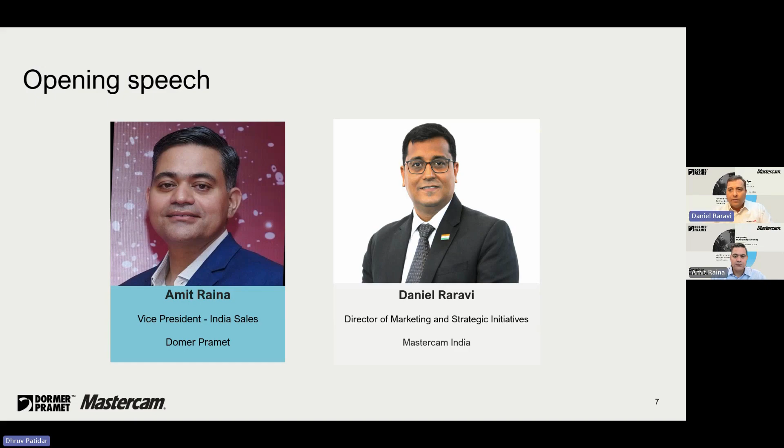And now, the heart of today's session. Multitasking machining is the ultimate productivity multiplier. It merges operations, eliminates idle time, streamlines complexity, and delivers unmatched machining efficiency.

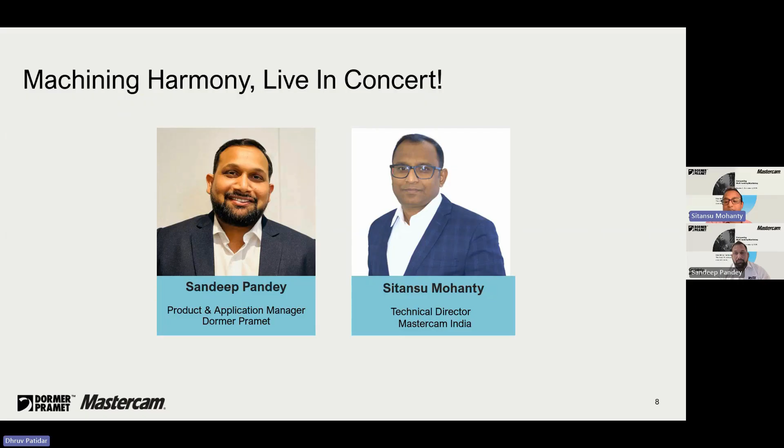As you can see, the topic is multitasking, and it's the third series. The initial series started with turning and dynamic milling. Then we went to high-speed machining as well as 5-axis. This series, we are talking about multitasking machines. If you go to the next slides, let's see the images. After seeing these images, you can understand that those parts require multitasking machines.

Think, if this multitasking machine were not available in today's world, how would we machine those parts? Previously people were also machining them, but without mill-turn, without multitasking machines, they had to make a turning profile and multiple setups for the milling. As we discussed, space matters, because if you have to put multiple machines, one for turning, one for roughing, one for finishing, space is a constraint. To avoid those situations, and for accuracy and finishing, the machining has evolved toward the multitasking machine.

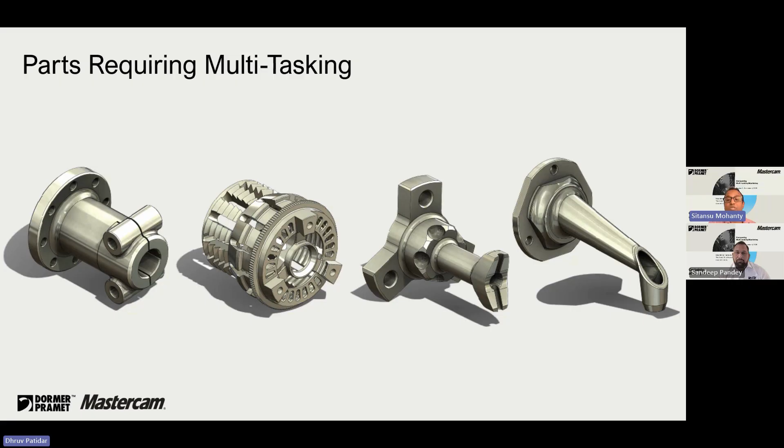When you discuss this mill-turn module, it is a combination of milling and turning strategies. It supports all kinds of strategies and options. Additionally, it supports part holding, bar stock, part transfer, and holding the parts between the main spindle and sub spindle. Let's understand what multitasking is and how it will help you. Go to the next slide, please.

What is a multitasking machine? It's a machine which can perform many operations in one setup. This is exactly what we are looking for. Once the bar stock has been loaded into the machine, it has to do the turning applications, the machining applications, the multi-axis applications, and both-side setups have to be reduced. So it reduces the cycle time and increases accuracy, because it is one setup, not multiple setups.

We call it multitasking because it reduces setup and machining time and increases productivity. Which type of customers require this kind of machine? That is also a big question. The normal die mold industry does not require such a multitasking machine. Today we are focusing more on aerospace, some parts of automotive, and medical. These are the major industries running such machining, because the parts and processes are complex, and people have to think differently to minimize the process and cycle time. The multitasking machine will help you with this.

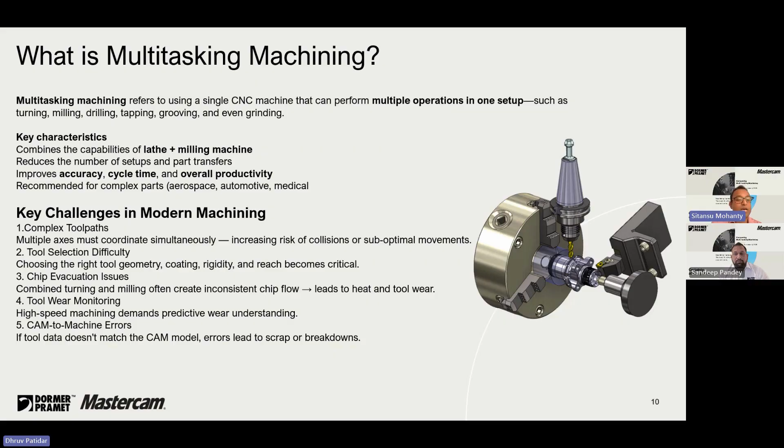Next slide, please. So if you see this particular machine, XYZ is a common standard 3-axis machine. But when you go for multitasking, X, Y, Z, B, C, when you include the head orientations, main spindle, sub spindle, turrets, multitasking is always more than 9 axis. So all the operations, like Sandeep was explaining in the previous picture: one tool is doing drilling, another is doing turning, some other tool is doing 5-axis machining.

So multiple tools, because we have multiple turrets, upper turret and lower turret. Those operations are combined synchronously, and it shows how to reduce the cycle time within the shortest time. The cycle time has been reduced because of the synchronization of the many parts.

And when you incorporate more axes, the important thing is the collision chances: the collision between the axes, collision between the part and fixtures, everything a user needs to consider. For that reason, within the software also, we incorporate two, three things importantly. First, the complete machine model setup has been incorporated inside the tool.

The tool geometry, as we discussed, 3D tools or any profile, any customized tools has to be incorporated within the software, and the strategies. These three things have to be combined together to create nice toolpaths which can be collision free, error free, and the user will get more confidence on that. This will always allow the complex profile to be machined in one setup because we have all axes incorporated together.

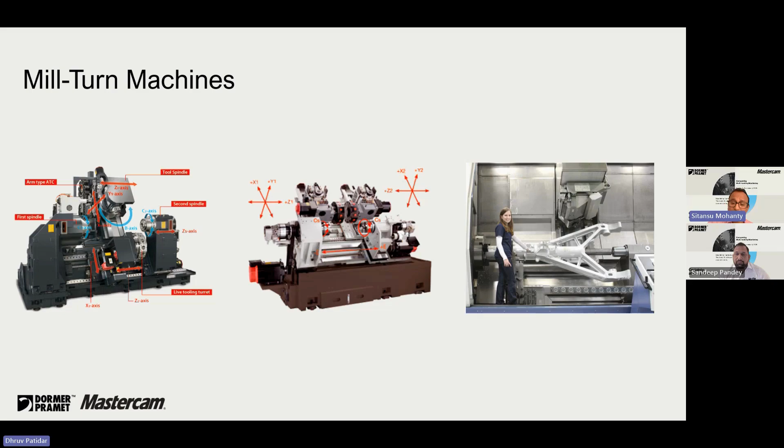Also, if you go to the next slide, we can see there are many turrets and you can assign specific slots for specific tools. Like I told you, we can directly import the Dormer Pramet tool models library into Mastercam, and we can assign number of tools, number of holders, everything. Whatever library they have, Sandeep, we can import inside the software and create the strategies. So can you throw some light on these kinds of tools and how they will help you in this?

Yes. So you know that many of these machines come with multi-station half index tool locators, tailstocks, steady rests, collet chucks, then the VMC spindles which will have HSK or BT tapers. So you will see multiple combinations of work holding and tool holding arrangements. And fortunately in Dormer Pramet, we are equipped with all these kinds of tool holding arrangements, where you will find we have PSC or Capto systems, simple turning tool adapters, VDI adapters, and all kinds of spindle tapers, BT, BBT, HSKs.

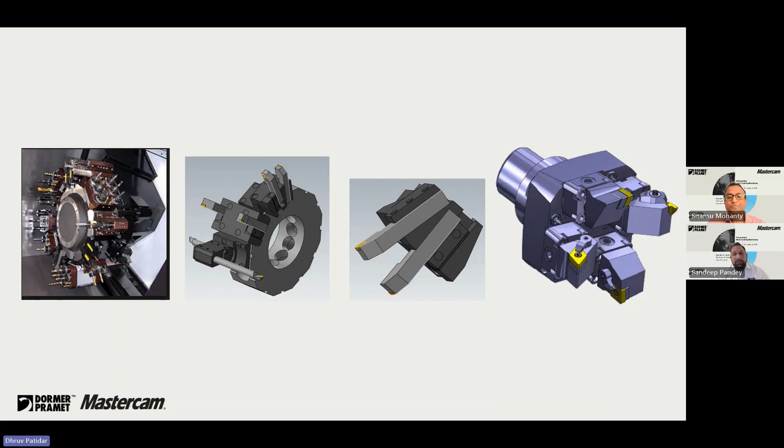So we have everything. And as you rightly mentioned, Sitansu, we have the models available in the Mastercam library, as well as on our website, where it's free for all. Anybody can download the 3D models, easily incorporate them in their software, and use them for simulation purposes. Absolutely. Next slide, Dhruv, please.

As we discussed about the multitasking setups, now let's discuss more about the role of the cutting tool in multitasking machining. In multitasking machines, turn-mill or mill-turn machines, the cutting tools are very critical in enabling multiple machining operations in a single setup. Because these machines combine turning, milling, drilling, and other processes, the cutting tool system should support high flexibility, stability, accuracy, and at the same time give more productivity.

And why it becomes very important: as I mentioned earlier, you need to manage different cutting forces. The cutting forces will shift between radial forces during milling, axial forces during drilling, and tangential forces in turning. Your tool should compensate all these cutting forces so that they don't go to your part or your spindle. It should avoid vibrations and at the same time maintain stability.

When you are selecting tools for multitasking machining, you should always keep the tool overhang optimum, because even 10% of overhang can destroy the performance of the tool. So it is very important to keep an optimum tool length. Here Mastercam comes into the picture, where you can select an optimum tool length and see the simulation, so you will not face any collision issues while running the actual program.

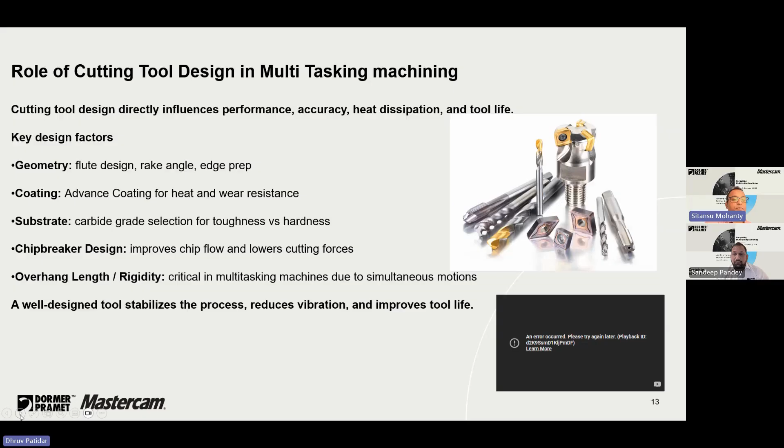So while generating any program, what's important, as Sandeep said, is geometry, because that particular geometry prevents collisions and improves the toolpath. The cutting edge point and cutting edge profiles improve the toolpath accuracy, and it finds out if there is any additional cut or hitting on the fixture or the workpiece. Everything will be calculated from that particular geometry, as well as the cutting parameters.

As we mentioned, we can directly incorporate the Pramet tool library into Mastercam, so automatically all those parameters are also included. Thank you, Sandeep, for giving all those parameters. A new programmer can easily sit and understand: when I'm browsing this particular tool, I'm already getting the efficient parameters from the tool manufacturer. Mastercam also, when you're machining the same tool with a different material, suggests parameters which help the programmer create programs in an easy way.

That is the major process: the tools available to us should make everything more smooth and easy. Like we discussed about the machine models, why simulation and digital twin simulation is required: because these machines are multitasking, we have many axes moving together, multiple operations going on, some operations on the sub spindle at the same time as some operations on the main spindle. So it's a combination of many things to optimize the exact cycle time.

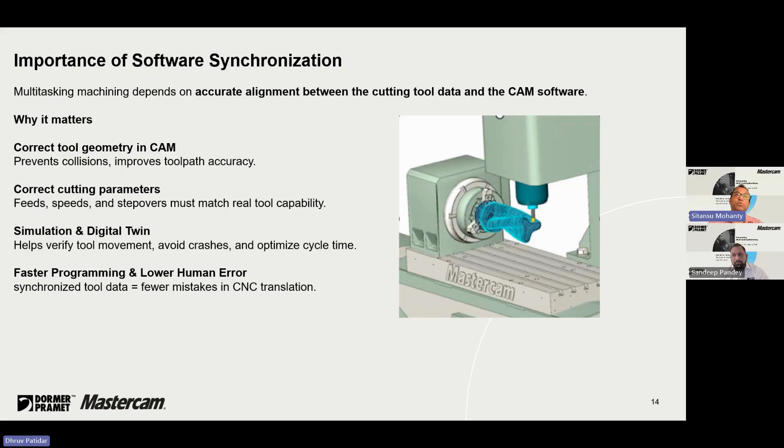When you are confident, you get the right tool, right strategy, right passes, and you can simulate everything on your screen before going to the machine. That gives you more confidence in how easily and quickly this can be possible. Let's go to the next slide. I'll explain how the software allows you to generate toolpaths for those kinds of operations.

When you open Mastercam, we can see we have different modules for different industries. We have a turning module, a milling module, and today we are discussing mill-turn, the multitasking machines. When you go for a mill-turn or multitasking machine, initially you have to define which machine you are going to use. You can see it on the screen. You can specify the machine name, whether it's a Mazak, a Haas, a DMG, or any kind of machine, and directly select within the software that you want to machine the part on this particular machine.

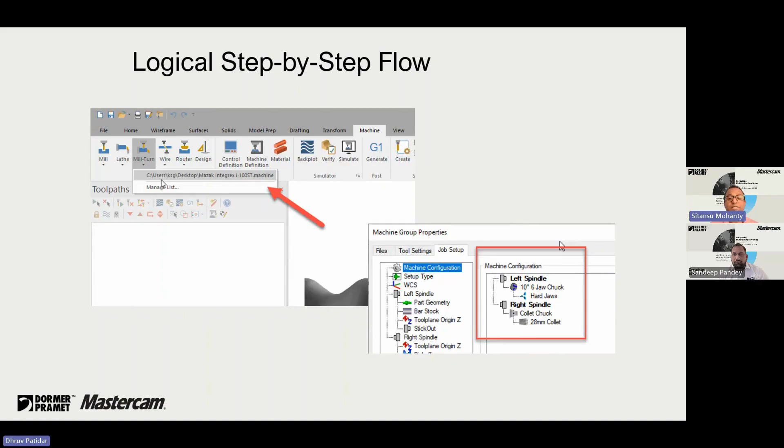When you go to the machine side, you have to define what kind of part you want to machine, like the 3D model, which I'm going to show you, like in the images in the initial slides. These are the parts, the part geometry. You have to just select the part geometry, and you have to select the stock.

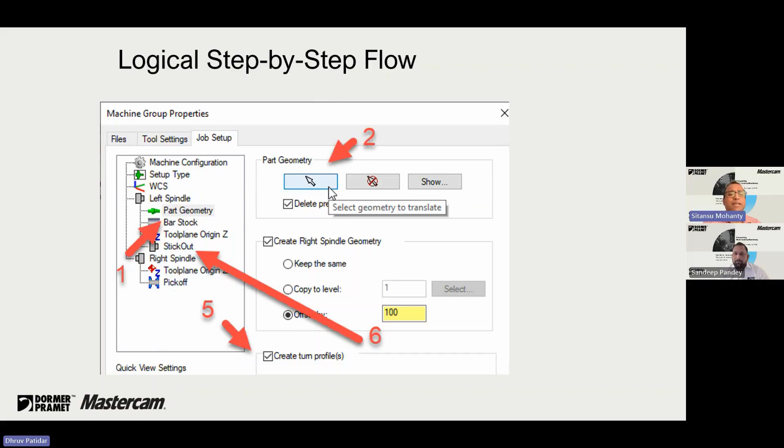What is the material? Either you are looking for a rectangular material or a circular material, you have to define that stock as well. So minimum setups - you can see how much stick out for the job, how much you are going to clamp it. The software has to be user friendly, giving minimum information required to generate any kind of passes. You define the machine first, define the part geometry, define the stock, define the stick out system of the machine.

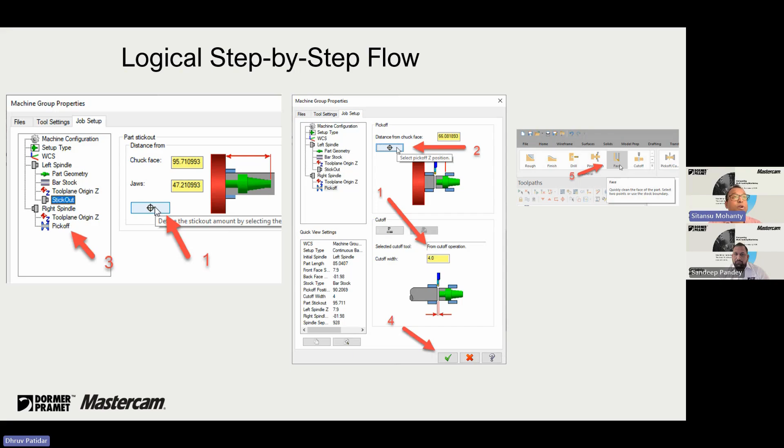Next, we can see different types of tools. As we discussed about the library, you can directly import. When you define that I am going with the upper turret, it will show you which suitable tools are available for the upper turret only - it will not show you the whole assembly. That is important, because if you get 100 tools, you'll get confused. Your turret has a capability of 16 tools, so it will show you all 16 tools available, 1 to 16.

That makes the process easier. That is important - when using a tool, you have to make the process easy. If it is difficult, the user will tend to make mistakes. To avoid such mistakes, we use the advanced options. This helps you select the proper tool.

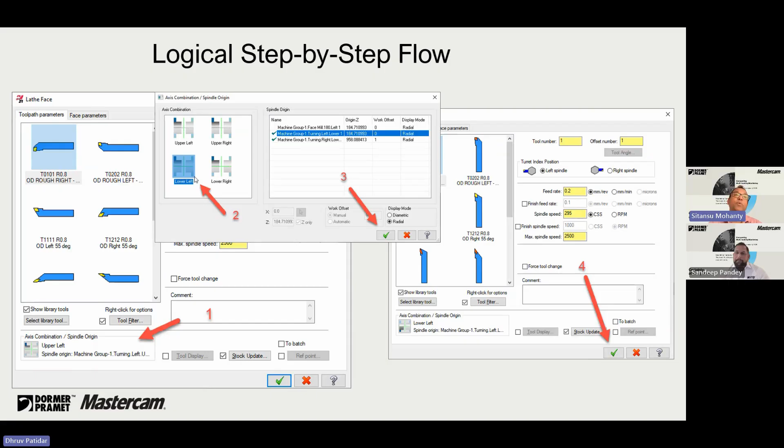Then you just define some lead in, lead out, because that is also an important part of programming - how your tool is going to enter into the material. If I directly plunge into the material without any strategy, it may break the tools, it may break the spindle, it may give more load on the spindle, it may throw out the job.

So the software automatically allows you to go through all those options. You just have to tick or untick, and automatically it will create those strategies.

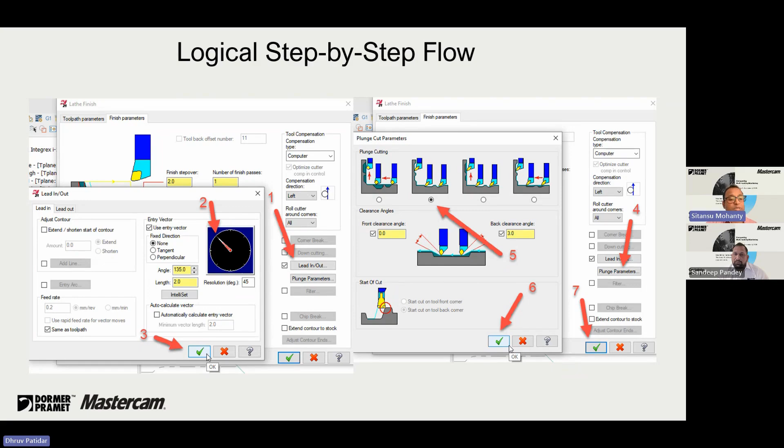Along with that, as I told you, we are importing the complete machine within the software. Inside that, we can also define the steady rest or the center subspindle rest - all the fixtures are available on your complete component. When you're machining the component, there may be fixtures, there may be a steady rest, which are going to hold your part or hold your job.

That allows you to check the collisions, because as I told you before, most important is correct tool selection, strategies, and finally you have to run on the machine without any collisions. So that gives you everything incorporated in a single window.

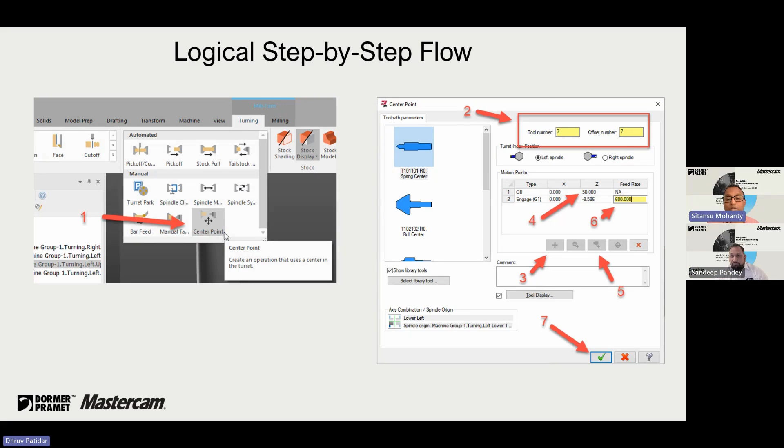It will be nice if we can play some video and demonstrate a real life example, and then talk a little more about the tools and how this works. Absolutely, absolutely. If I go to the next slide, I can show you some videos. Just see that particular part.

This is the machine we are using, DMG Mori Seiki NT4300.

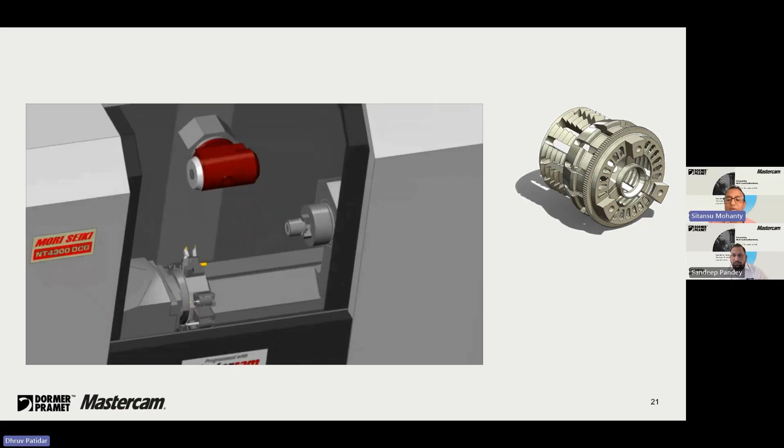The part model is called the Ironman powerhouse unit housing. You can see this particular part has first been placed in the subspindle and it's doing its operations. At the same time, it will change the operations from the subspindle to the main spindle, and it will start doing those operations. This kind of synchronization is very important to avoid any collisions.

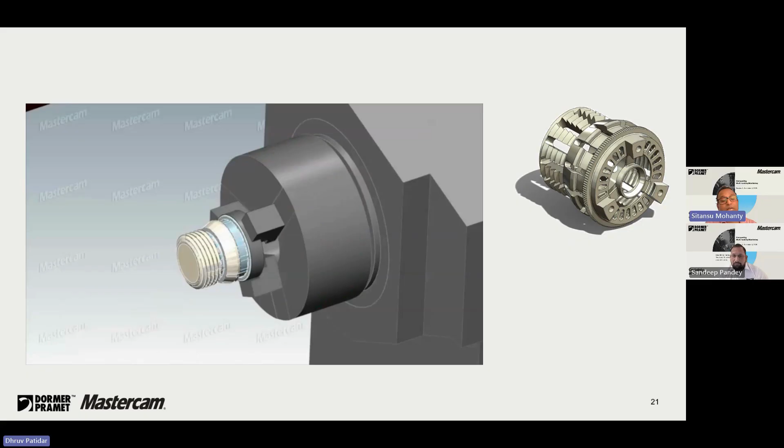You can see in the turret also, Sandeep, all those turrets, how much tool length is required. If the tool length is larger, whether it is colliding with other parts of the machine - those things also you are able to see. Here you can see there is a long range of tool being used.

So I think Sandeep, you have some solution. I heard somewhere Dormer Pramet has a solution for this longer tool length. Yes, yes, yes, so can you show about that tool length as well?

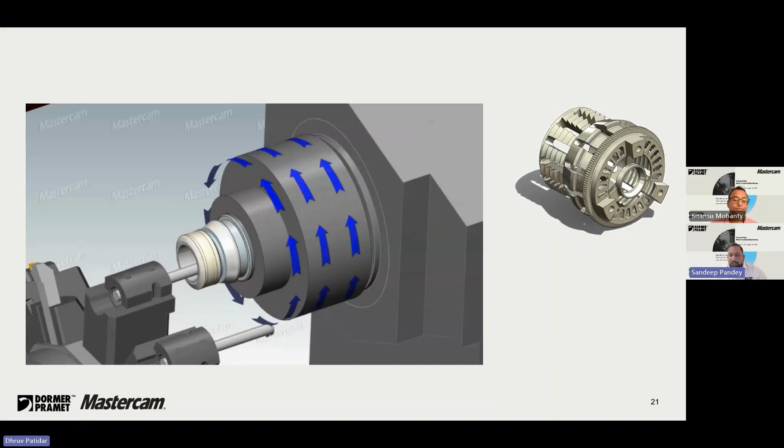When we talk about longer drills, Dormer Pramet is equipped to deliver entire solutions for these multitasking setups. Out of all these solutions, we have one which we call modular drills.

Modular drills have multiple features compared to normal indexable drills. With indexable drills, we don't get high quality holes, but with modular drills there's a separate head made of solid carbide, and a drill body with a length up to L/D 12, and a diameter range from 12 up to 42.5 - a very wide range.

The L/D ratio starts from 1.5, and goes to L/D 3, L/D 5, L/D 8, and L/D 12. Many other cutting tool suppliers have similar products, but the beauty of this product is the easy exchangeable heads.

When doing multitasking machining, taking the tool out of the machine and putting it back into the spindle takes a lot of time. But with this tool, there are two mounting screws in the drill head which you can easily replace, just keeping the tool in the holding system or in the machine itself. You don't need to take out the tool, go to the Zoller, change the entire tool, and put it back to the spindle - that takes a lot of time. By just putting this tool into the spindle, you can reduce man hours and increase your productivity.

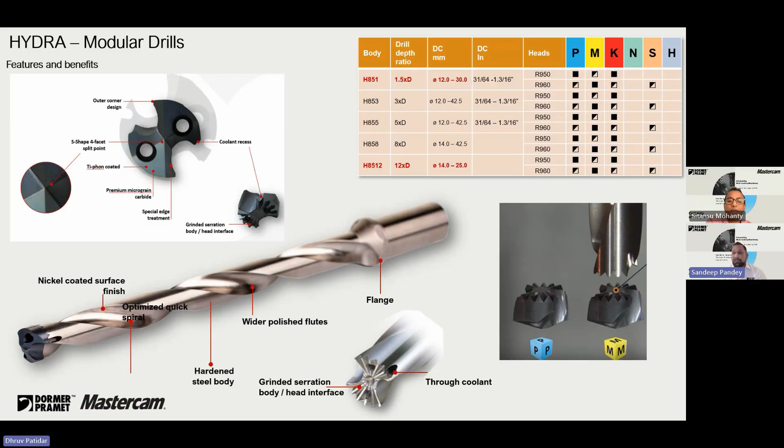Every time you will be getting tool performance equal to a new one. With regrinding, you will not get similar performance like a new one - that's the beauty of this product. It's as equal as solid carbide, but also reduces your cost and gives more productivity benefits. So it is a must-have tool for your multitasking setups.

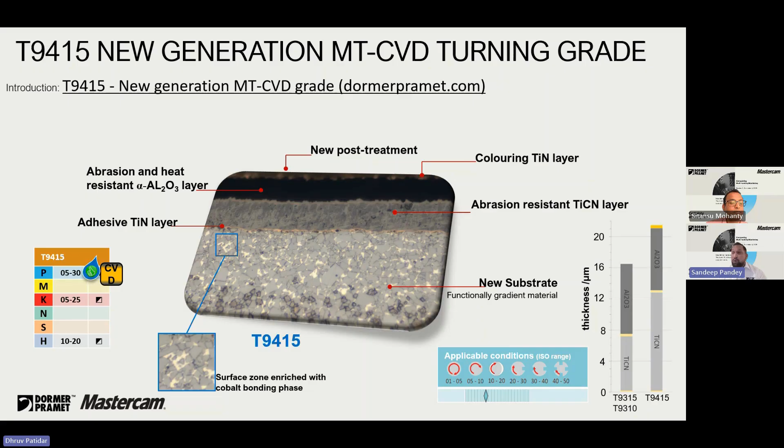What advantage you'll be getting with this is that whenever we put the insert into the pockets of the tool holder, we get a very proper seating, and your insert will not deflect during machining, or while taking higher cutting parameters. It will give more productivity, avoid vibrations, and give a good quality surface finish as well.

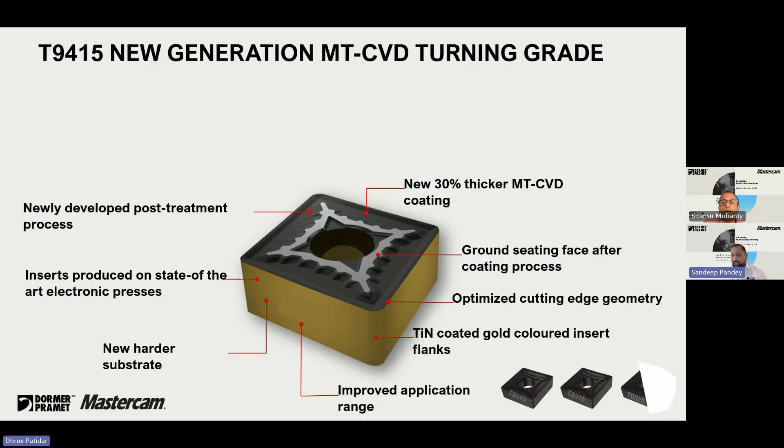Over to the next slide. Absolutely, Dhruv. Yeah, yes Sitansu, absolutely. So these are the inputs I thought for the programmers.

As you said, there is a 30% thicker surface coating. I think this will give more tool life - more running time compared to other inserts - and better surface finish, and the programmer can use high feed, where today's demand is to reduce cycle time. When you go for this multitasking machine, the main concern is accuracy and cycle time. So I hope this kind of technology you are providing definitely helps the user to reduce cycle time drastically.

Right, Sitansu. And also we are talking about quality, accuracy and everything, but I think we are missing one part - the economy, or maybe the CPC of the part. So here comes this tool, the SW104, which is a triangular insert. The triangular negative insert, meaning double-sided insert, comes with a 6 cutting edge design, starting from diameter 16.

You will be surprised that not many competitors have a 6 cutting edge insert in such a lower diameter, like 16, 20, or 25. When we have these kinds of setups, you get a lot of operations where we need this kind of smaller diameter tool, which can perform multiple operations like slotting or wall finish. So here this tool comes into the picture, where you can get the advantage of 6 cutting edges in a diameter 16.

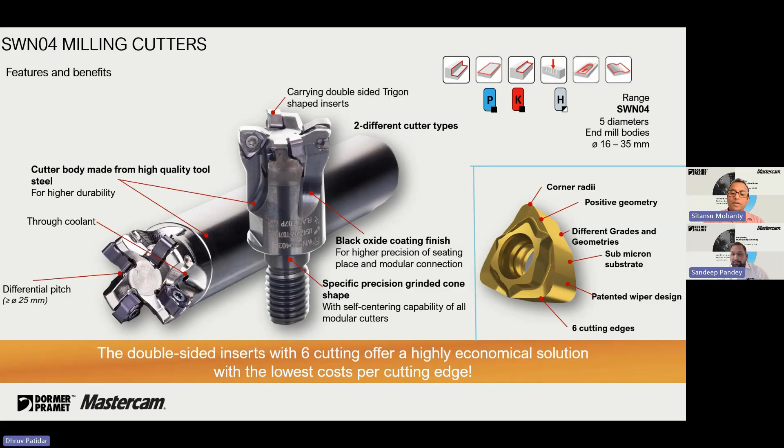Over to the next slide, Dhruv. Absolutely. Yes, by this coating surface, the wear resistance is increased. That is important because we have no need to change the insert very frequently. Let's go to these videos. You can run these videos, please.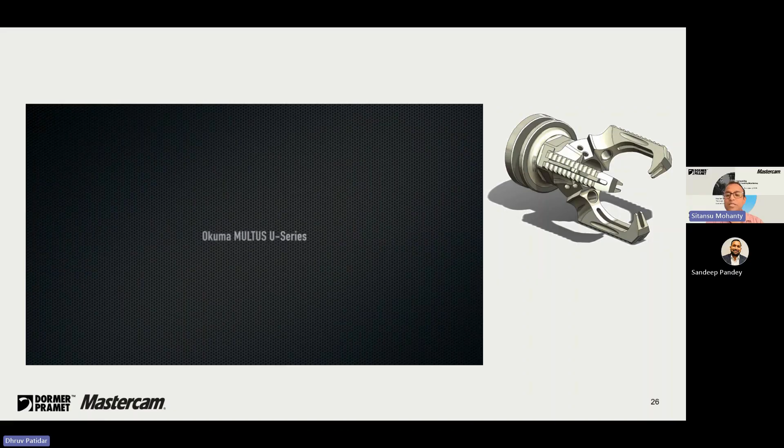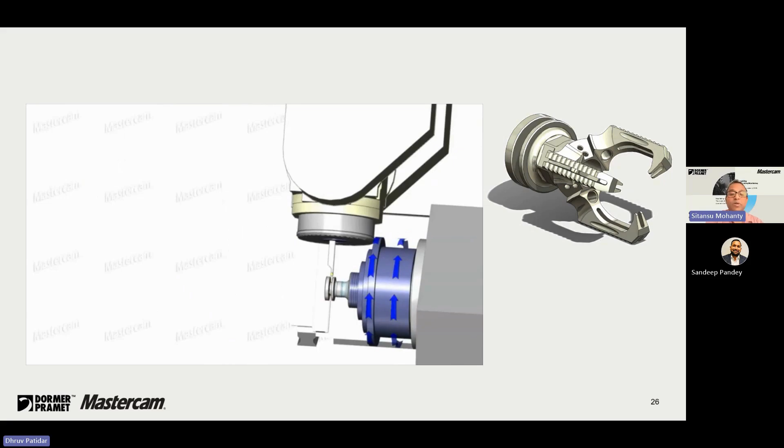Yeah, this is an Okuma machine with a Multus U series. You can see this particular part. This part is called a space shuttle capsule. On this same Okuma machine, we are able to do a combination of turning applications and milling applications. You can see this particular machine also has a B axis. The B axis is the head operation, which is currently on the screen. You can see it.

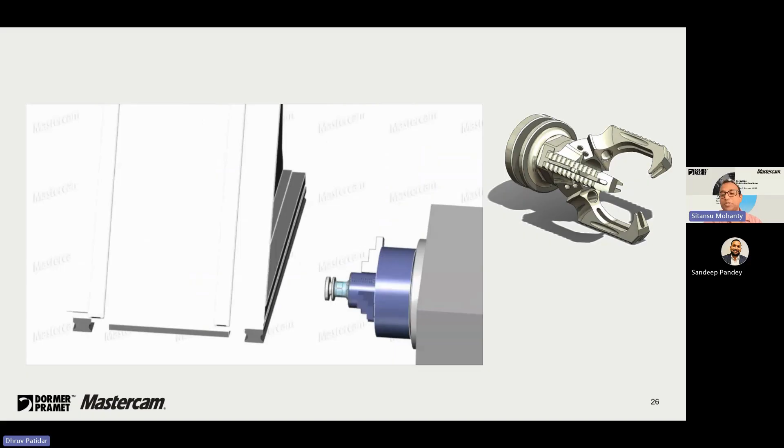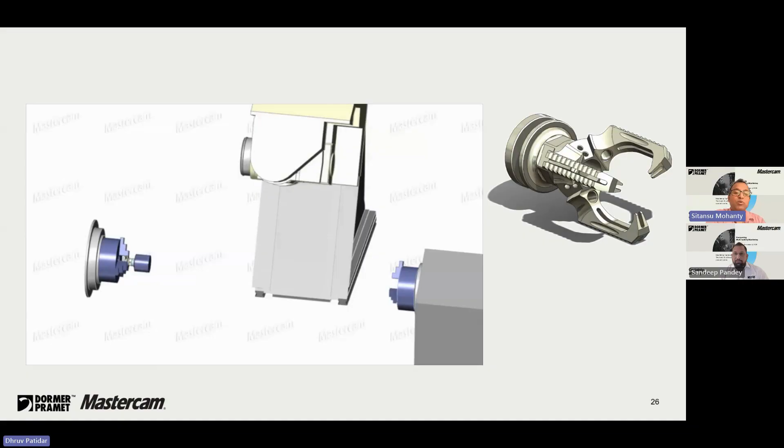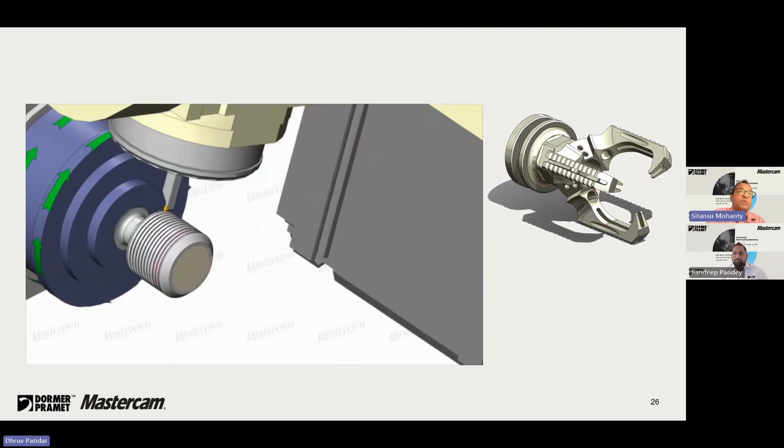It's a B and C axis combination where you can use the multi-axis options as well as the turn-mill features. This combination always reduces your cycle time and improves accuracy. That's what we are going to discuss. And in this particular case, you can see dynamic milling has also been used. 3-axis dynamic milling has been used in this particular module, where it can directly enter into the material and remove the bulk material from the part.

I would like to pitch in here, Sitansu. So you see this dynamic milling strategy, which we had discussed in our first session, and I'm very happy to again say that Dormer Pramet is equipped with these dynamic milling tools. We have a dedicated end mill series for these dynamic milling strategies. Great.

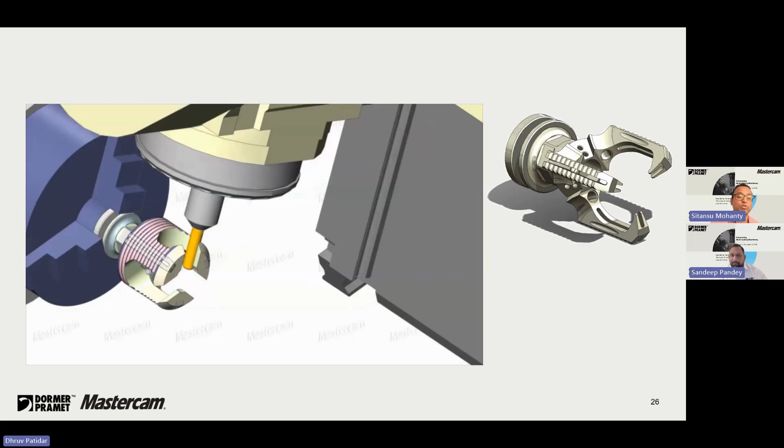Here also you can see the B-axis machining in a closer look. Some profiles, the conventional 5-axis profiles, can be machined with the ball tool by tilting the head at different angles, which on some 5-axis machines may not be possible because of reachability issues. With the help of this turning and milling combination, we are able to manage those surfaces' machining as well.

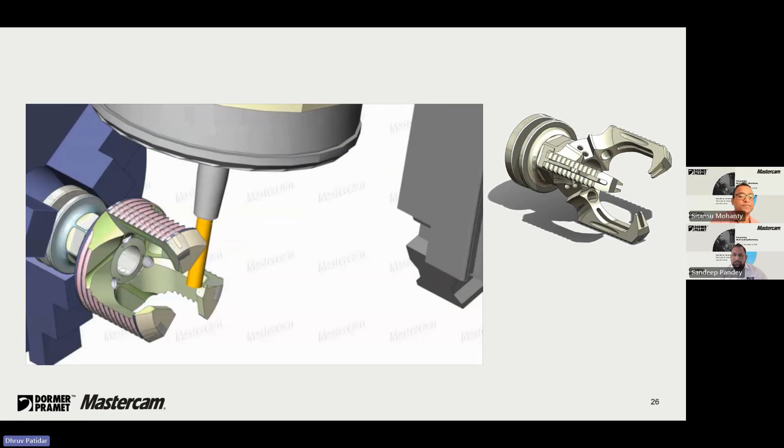Right, Sitansu. So I think Dormer Pramet here can help customers achieve good quality surfaces, as well as reduce the cycle time while keeping their CPC very low. So Dhruv, can you go to the next slide? Absolutely.

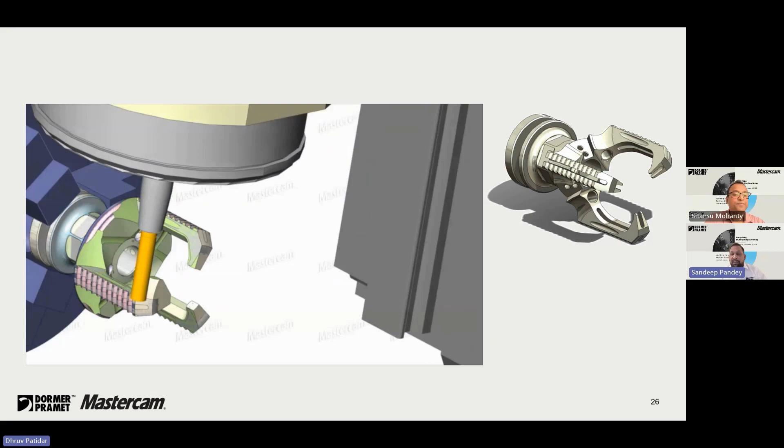So here the tool comes into the picture, which we call SAD07. The insert is ADEX07. It looks like a very simple tool, but it has very unique features. I would say that no one else has this kind of unique feature. This is a tool which has a high feed geometry starting from diameter 10. In the industry, nobody has a high feed cutter starting from diameter 10. So this is something really phenomenal.

You can see the insert has all the capabilities. You can do slotting, ramping, helical interpolation. You can enlarge the hole. You can plunge the hole. You can do the profiling. You can do all the things you need. And the best thing is it comes with different designs. It comes with a modular design. It comes with a shell mill design.

If you need a longer approach, many times when we are doing multitasking we need to go into deeper cavities, and with such smaller diameters like diameter 10 and diameter 12 in solid carbide, it really becomes very difficult. If you are using a solid carbide tool and the approach is so long, you will not be able to take higher cutting parameters. And there is also a chance that your tool can break.

If you use these kinds of tools, you will avoid the issue of breakage first, and at the same time you will be able to run these tools at higher cutting parameters compared to a solid carbide mill because of this high feed geometry.

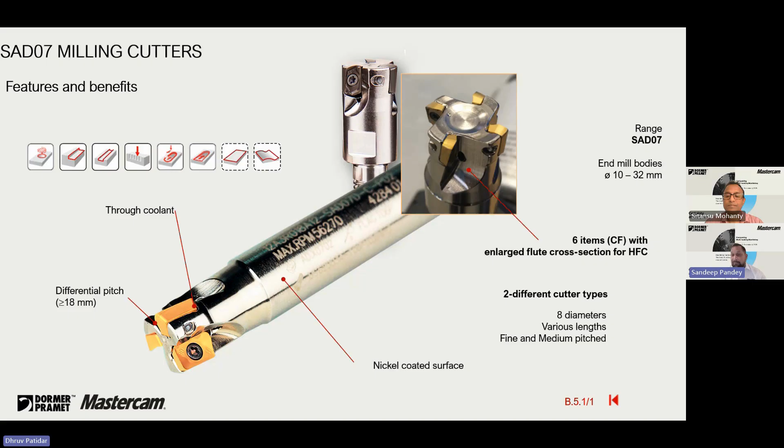Can you go to the next slide, Dhruv? So you can see this geometry. This is a high feed geometry that we have for this insert, the ADEX07, where you can go with a feed rate of approximately 0.25 to 0.9 per tooth for steel kind of material. So 0.25 to 0.9, which is really extremely good.

If you are using a solid carbide end mill, you will not be able to go with such high cutting parameters. When we are using this high feed geometry, it reduces the approach angle, and by doing this we get the benefit of making this tool a high feed concept. Generally these inserts come with a true 90-degree design, but in this high feed design, the incorporated radius in these inserts makes this cutter work as a high feed.

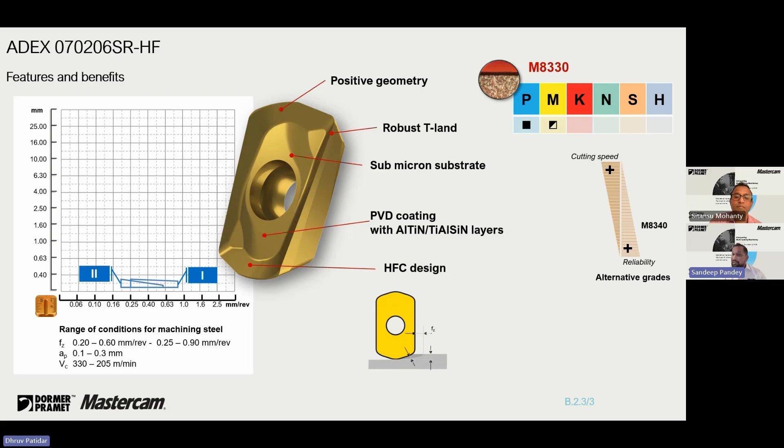And also these inserts have multiple grades and multiple geometries, which can go for other operations, like machining steel, stainless steel, even cast iron and super alloys as well. To the next slide, Dhruv.

Because of the high core diameter and the larger flute space, even though this is a carbide end mill, you can use a cutting speed of approximately 500 to 600 for aluminum machining, which is extremely high, and you can take a feed rate of around 0.3 to 0.4 because of the good chip evacuation space. Your chips can easily evacuate from the machining area, and you can go with a depth of cut of up to 2D in these cases. I just wanted to show you a glimpse of the Dormer Pramet end mill range.

Yeah, Sandeep, really happy to see all those flutes, because in dynamic milling we always machine with the flutes, not with the base. So when the flute count increases, the efficiency of the tool will definitely increase, it will give you more chip output, and we can give a larger depth of cut because it is completely machining from the flutes.

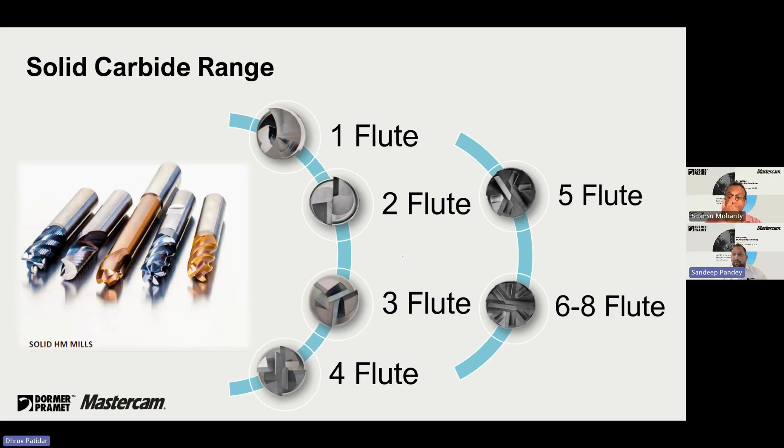All these features are available with these kind of end mills. Absolutely. I hope with this we can close this session for question and answer, and I hope we were able to deliver what multitasking machines are, what the kinematics of the multitasking machine are, what the requirements of multitasking machines are, and how efficiently you can use the tools and the strategies. I hope the audience has gathered some information, and if you have any questions, please feel free.